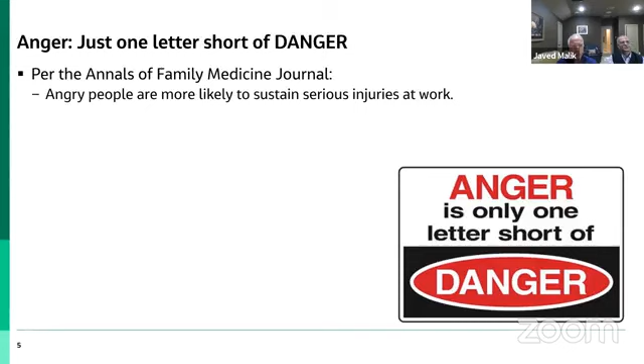But we need to remember that anger is just one letter short of the word danger, because it can lead to dangerous actions on the part of that person who is angry. I will give you these stats here that angry people are more likely to sustain serious injuries, not only at work, but every place. I will not go through these stats, but as you can see, most of the patients who were injured were angry or irritable before that accident occurred.

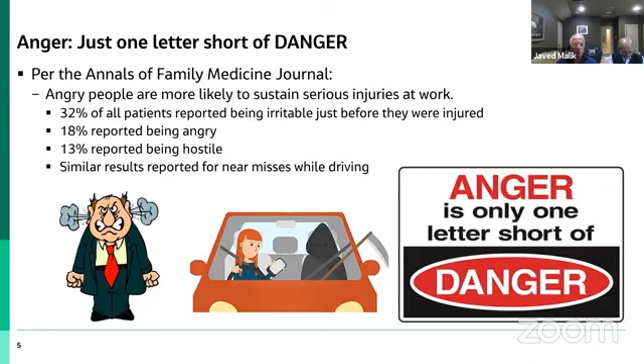So we have to see what we can do to take care of the anger. Just to share with you a recent story in our Houston area: one of our Imam Masjid, his two sisters were driving and they were killed by an angry driver, because somebody must have cut off the other person or whatever. I don't know the details, but because of his anger, this person got out of the car and killed two young girls. So we need to avoid those situations.

So what can we do to basically avoid being angry at work? I use the word 'at work' because here in US, there are some angry people who, if they are laid off or whatever happens to them, just pick up the gun and start shooting, whether it's school, work, or anywhere else. So the slide is tailored towards anger at work, how to avoid that.

So we need to basically determine the reason for the anger and try to remain calm. We should not react immediately or overthink. We need to assess the situation and see what we can do. We need to communicate. Most of the anger occurs because we are not communicating properly, either we are not listening or the other person is not listening. So if we can communicate better, that can hopefully take care of some of the issues.

The next thing is, if you cannot get away from an angry situation, you can remove yourself. You can move out. If there's a person who is bothering you, continuously attacking you, just avoid that person, because he will make you angry and you will react in a bad way also. You can take a walk, take a break, do things that make you happy, and look for the positives. Always look at the glass which is half full and not half empty. And also, don't sweat the small stuff. Don't get mad on small things which are not going to bother you the next day, so there is no reason for you to be angry about those today.

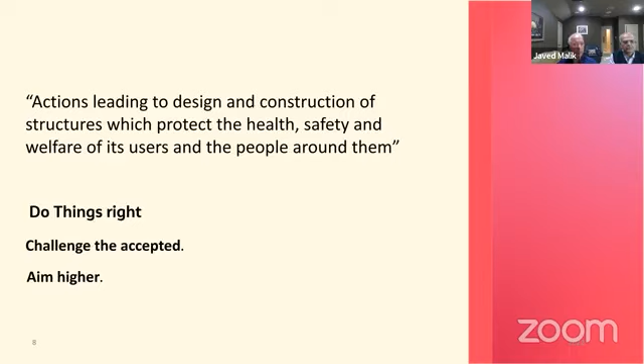So the gist of a good engineering practice is good ethics. And I will come into more details on what the good ethics are.

Competency - good ethics alone are not enough. A person who is practicing must be competent enough. He should know what he is doing. And then competency even is not enough if you do not keep yourself up to date with the state of art knowledge. You need to at least be aware of what is around, what's going on in the structural world or in the world in general, what other people are doing. So that is very important.

And then the use of modern tools and technology. The world is advancing. I'm working on some projects right now where the deliverable is not even the drawings. We are so much used to these paper drawings and documents, but on that project, the deliverable is the Revit models. So you deliver these Revit models to the clients and they take it from there. Of course, there are still typical details and notes in PDF form, but paper is gradually going away.

So we need to be aware of what are these modern tools and technology. If somebody is not well versed in Revit nowadays, then he's losing the battle already. So we need to be up to date with these tools and technologies if we want to compete with the rest of the world. And then also, the quest for excellence should always be there.

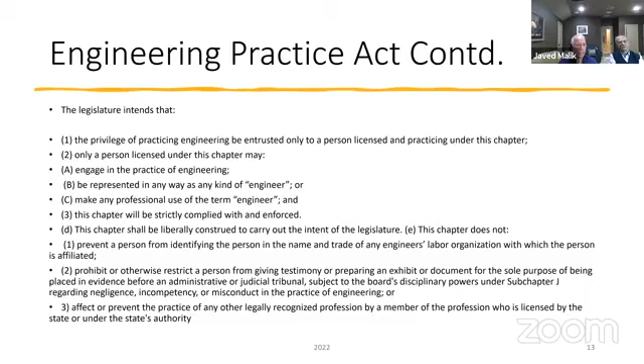Here are some more details of the Engineering Practice Act. I just copied it in; you'll get a PDF copy of this presentation so you can read it. But the gist is that any licensed engineer is responsible for his design, since he is entrusted with the health, life, and safety of the public. The sealed contract documents must be prepared under the direct supervision of the design professional. You cannot just give your project to somebody else and say, you do it and I will sign and seal it — that is totally illegal. If it is found that you did that, your license may be revoked.

Only a person designated as a licensed professional engineer can sign or seal the contract documents. Every month I get a letter from the state board — I'm registered in more than 20 states — telling us how many people's licenses were suspended or what actions were taken. Some of these things may seem very minor, but people are supposed to be totally honest and work with integrity. So these are the very first things of good engineering practice, as I said: good ethics.

So with that, we'll move on to the next part, which is the quest for excellence. As I said, good ethics alone are good, but if you want to practice engineering, you have to shoot for excellence. Here is Dr. Asif Wahidi, who was an engineering manager for many years. He will give some tips to young engineers as to what to look for and what to do. So without any further delay, I will hand it over to him.

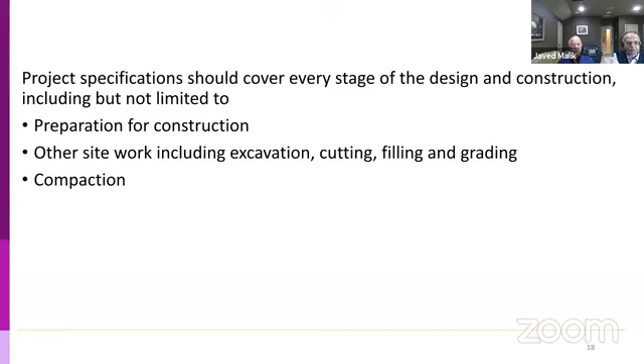Moving along, the specifications should also include excavation, cutting, filling, and grading. Compaction should also be included—we don't have to specify everything exactly, we can refer to standards already in place. For compaction, we have ASTM standards, like ASTM D698, and another one I don't remember the number for. We need to specify which standard to use, the maximum compacted density required, and that compaction should be done within a few percentage points of the optimum moisture content.

Digging or drilling for foundations is very important. Foundations have a few things inherently important that we need. Number one, the base of the foundation where the load bears should be on undisturbed soil. We should tell the contractor to give the geotechnical engineer the opportunity to come in and verify the soil capacity by observation and conducting on-site penetration tests, to make sure the recommendations given for design of foundations are still valid.

For footings, the contractor should not dig with big equipment quickly and leave the bearing surface disturbed. For drilled piers, they should be neatly drilled. Bells of the piers should have the required support so they don't cave in. The drill piers should be drilled just before we are ready to concrete. The belled piers should not be left open overnight, because caving could occur or rainwater could get in. So the concrete should be poured immediately after that.

All this should be in the specifications. Otherwise, the contractor may not do it and you cannot enforce it—they may ask for extra money and so on. Any material used on the site, including materials for concrete, coarse aggregate, fine aggregate—all specifications should cover everything needed on the site, including procurement of the materials.

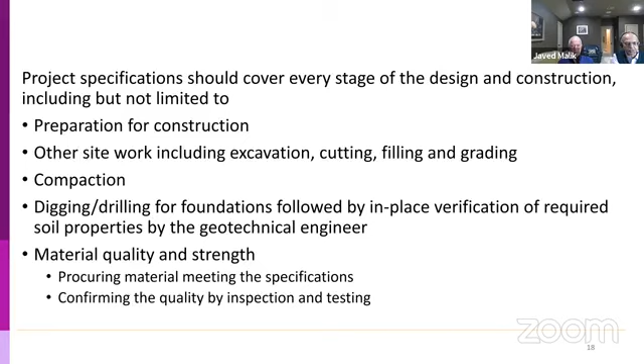And nowadays, as we see the effects of climate change, more and more standards are being developed to use recyclable material and low carbon footprint materials to be environment friendly in our construction. Some of the things we have been doing in the past is using less cement on our projects by replacing it with fly ash and blast furnace slag and stuff.

And also, there are requirements for obtaining materials. In the US, you get credit for getting material for construction from within 500 miles of your construction site, and so on and so forth. This area of knowledge is developing very fast. We should keep abreast of it and apply the latest knowledge on every project.

Then safety of construction during construction is important. That should also be stressed in the specifications. Good contractors will always follow good practices, but we have to make sure that even the ones which are not so good should do the job correctly.

Special instructions should be there in the specifications for storing materials on site and stacking them. The contractor should not stack too much material on slabs and structures, which may exceed the capacity of the structure during construction or may cause cracking or deflection. Also, stacking material on the ground on site is not good. The material should be elevated from the ground and protected from rain and stuff like that.

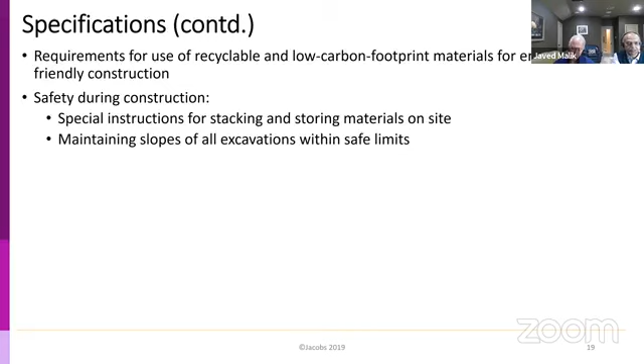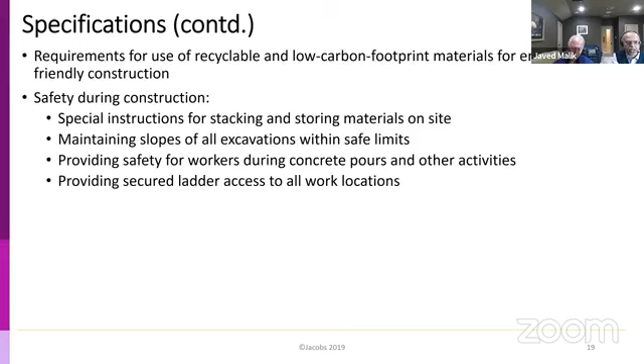Contractors should provide safety for workers at every stage of the project, during concrete pours and other activities. They should provide secured ladders when ladder access is needed. They should have people working in groups of two or more and avoid having people working alone in isolated areas, so that in case of an injury, there are other people around to help immediately.

Fall protection is very important for people working on elevated levels at the edge of slabs or roofs, since workers are susceptible to falling over. All workers working on elevated levels should wear safety harnesses, which should be tied back to secured tiebacks on the structure.

Inspection - I'm not talking about inspection itself, but the specifications should require that inspections be done. It should require that inspectors are chosen by the design consultants, and it should direct the inspectors to ensure every part of the specifications is followed. They should include what parts have to be inspected and when, and make sure inspection is done at every stage.

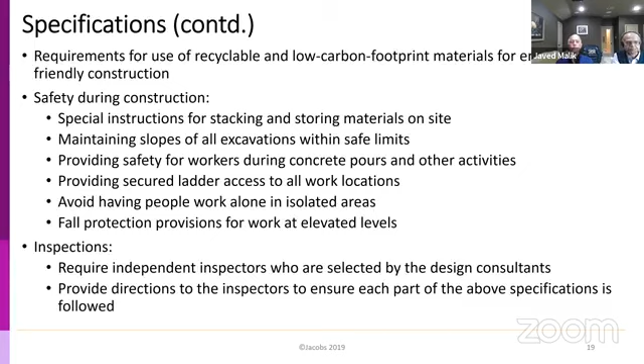After the specifications are done, we move into the design and construction phase. Here also, we need to continue the quest for excellence. One of the first things we do is make a computer model and analyze it.

One of the things we think about on every project, and we should, is loads. We should consider all loads that could affect the safety or serviceability of the structure we are designing, including gravity loads, which are dead loads, superimposed dead loads, and live loads.

Dead loads can be estimated very easily based on the density of the materials and the volume of the materials used in the structure and finishes. Superimposed dead loads and live loads are obtained from codes. They are based on a statistical analysis of loads, which is confirmed in existing structures randomly.

Some people do random inspection of loads. They go in and observe the load and note it down at certain instances for every occupancy. Then using statistical analysis, we confirm that the loads given in the codes are correct. If not, they are revised.

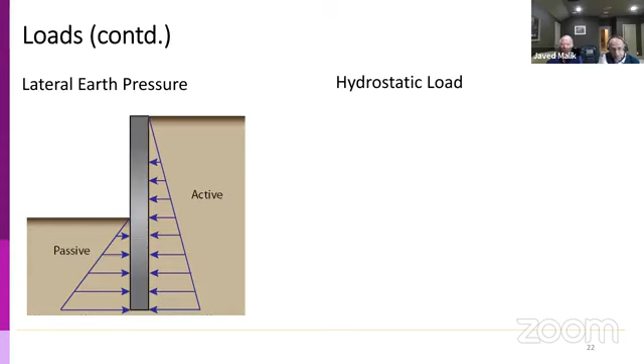So we can talk about the next type of loads: hydrostatic loads, and floods are on everybody's mind. For all of us - Javed, me, and everyone in Pakistan - flood loads have to be considered, hydrostatic loads have to be considered. Both these loads, lateral earth pressure and hydrostatic and flood loads, should be considered with maximum intensity.

But remember, for some cases, the worst intensity of the load may not be the worst case for the structure. For example, for an empty water tank, and also the underground water pump station I mentioned - when the water tank is empty, and when the pumping station was dry inside, that was actually the worst case. So we need to consider also when these loads are not present, as in the case of an underground water tank.

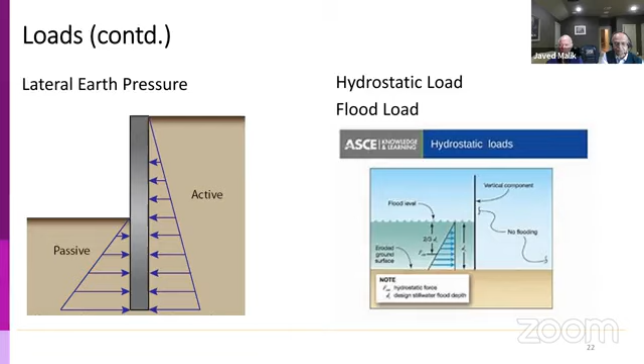For wind loads and earthquake loads, which may act in the opposite direction of earth pressure or hydrostatic pressure, the worst case is when these loads are not present.

Next load case - you guessed it, I already started talking about wind and earthquake - environmental loads. Wind loads are obtained from codes. Codes present statistical analysis based on wind speed observations made at different locations. This statistical analysis gives us the worst loads expected for the category of storm we are designing for, and the category of storm depends on the risk category of the structure. Higher the risk category, higher the design wind speed.

Wind loads - usually in a lot of codes these days - have a load factor of 1. So we should make sure we are using wind speeds which will result in loads with a load factor of 1. For serviceability conditions, for deflections, wind vibrations, and everything, we use lesser loads which occur more frequently on the structure.

Next, we move on to earthquake loads. Earthquake loads, like wind loads, are obtained from codes, which again are based on statistical analysis of data obtained from the sites.

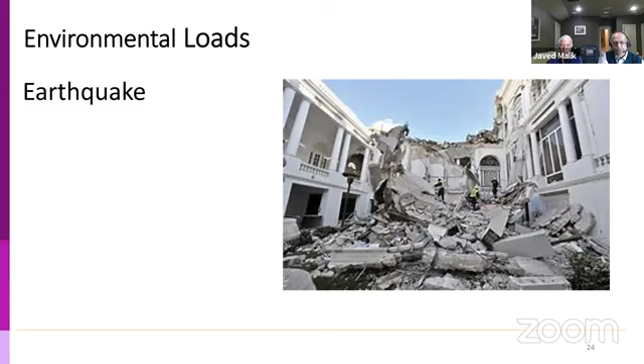Some structures like hospitals and emergency structures for firefighting are required to be operable immediately after the earthquake. Other structures need to be operable soon after, and some maybe later on. Depending on how soon the structure has to be operable, or if the owner wants special requirements to keep a manufacturing facility going, that determines how much earthquake movement and damage we permit for serviceability conditions.

The building had a transfer girder at the second or third floor which carried several columns. The girder failed due to the explosion, and the column supporting it also failed. This brought down all the columns supported on the transfer girder and a few columns nearby, resulting in progressive collapse, which was much bigger than the initial damage caused by the explosion.

We are required to design federal buildings in the United States to prevent this type of failure, classified as progressive failure, where much larger damage occurs than could be expected from the amount of explosives used.

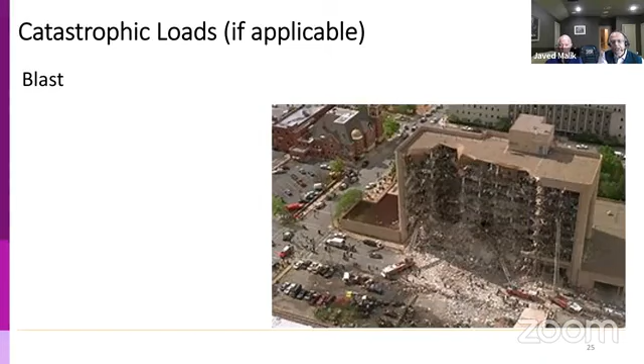Fortunately, not all structures are required to be designed for blast loads. Only those with a security concern, like federal buildings, and some owners with security concerns need this. Other facilities like petrochemical plants and plants manufacturing explosives or ammunitions, and areas around them, need to be designed for blast.

Tsunami loads are becoming more and more common in codes. A lot of literature has been developed and knowledge gained after the 2004 earthquake in Banda Aceh, Indonesia, and the Tohoku earthquake in Japan in 2011. This area still has a lot of research being developed, with codes and standards getting updated. We need to keep abreast of new requirements, and if designing any structure on coastal areas, ascertain if there is a possibility of a tsunami and check if the codes require tsunami load design.

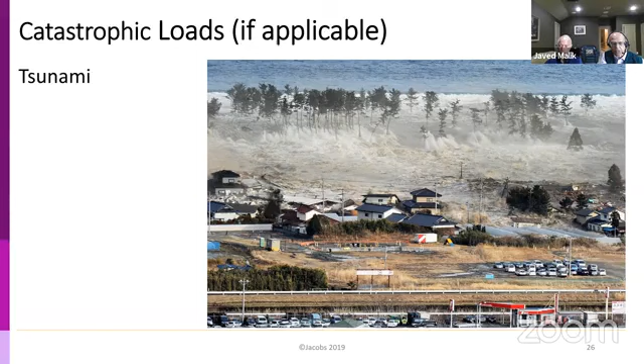Construction loads are important. Typically we don't design for construction loads, but in many structures construction loads could actually be heavier than service loads. The worst design conditions may occur when the load is on a partial span of the structure, or the structure itself or some element may be partially built.

We need to provide special instructions to the contractor on contract documents if any special sequence or procedure has to be followed during construction to keep the structure safe at all stages. We should also include instructions to provide additional supports if needed, or falsework needed during construction.

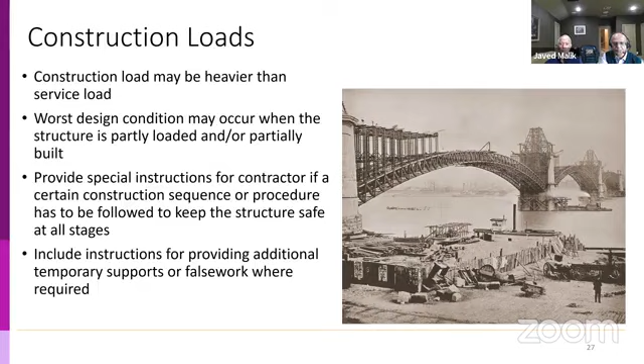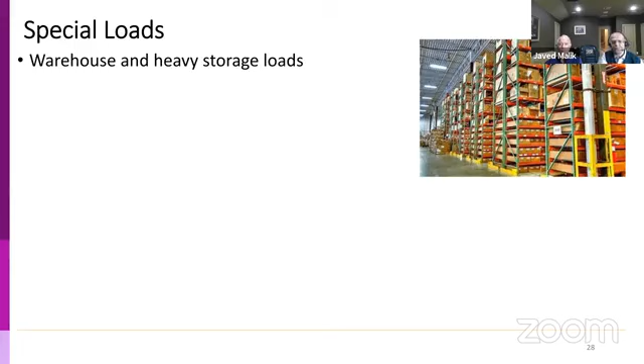Special loads - there could be a lot of them. I listed just a few, starting with warehouses loaded with heavy storage loads. Even the loads may be on slab on ground, so we need special design considerations for them.

Loads for machinery and movable equipment, which require strict construction tolerances and strict deflections, should require special design considerations.

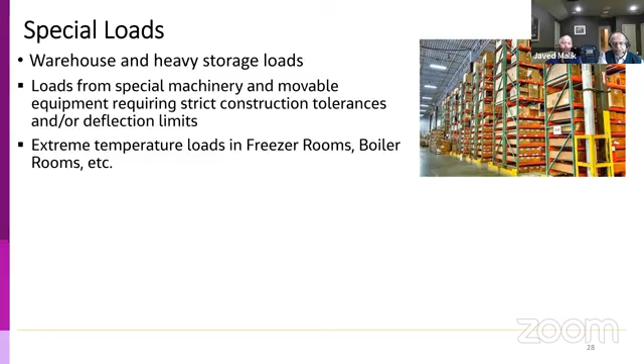Extreme temperature loads should be considered in freezers and boiler rooms. I've learned from experience that in freezers it's especially important to provide a thick slab at the bottom or additional insulation to prevent damage from frost heave. Additional insulation can also give us economy in energy consumption.

Creep, shrinkage, and temperature effects are important. Normally these occur on every structure. Smaller structures don't normally have to be designed for these, but large structures like warehouses and distribution centers need expansion joints.

Analysis of creep, shrinkage, and temperature can help us in sizing the expansion joints and determining where and how many joints to provide. Creep, shrinkage, and shortening analysis are also very important in tall buildings, where the exterior and interior columns may shorten differentially due to creep, shrinkage, or elastic shortening. We need to conduct an analysis and make adjustments to the lengths of the vertical load supporting elements to make sure our floors end up leveled at upper levels of the structure.

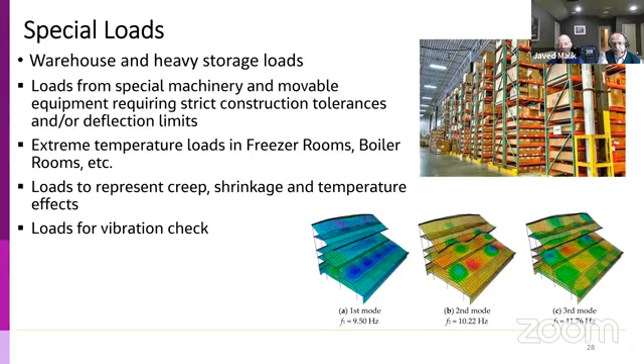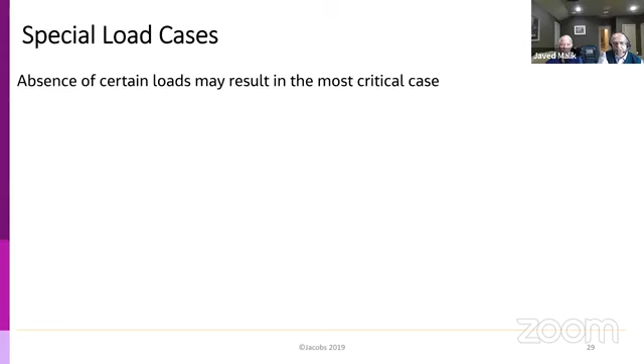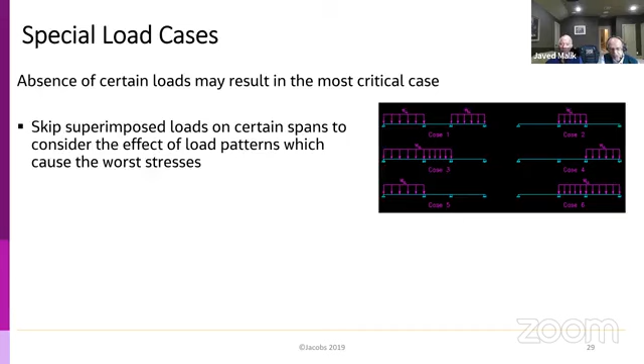From special loads, we move to special load cases. For continuous structures, the worst case is not loading all the spans with the maximum load. Often, the worst moments and shears are caused by pattern loads as shown in the pictures. Similarly, for structures like domes, arches, and even trusses, partial loads or point loads could cause stress reversals or maximum stresses more than what you expect under full design loads. So partial loads should be considered. Point loads, which may be even less than the full superimposed load, could cause more stress in a dome or arch, and even stress reversals in trusses.

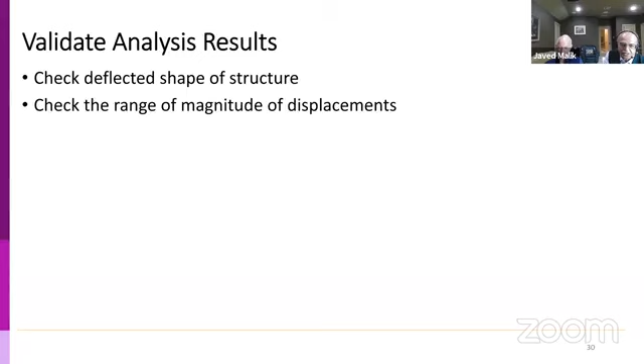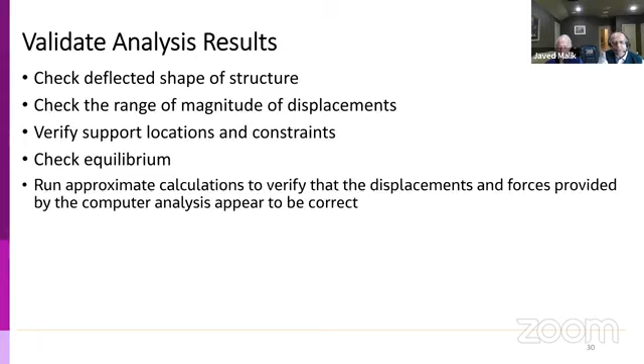Now we're done with the loads. Engineers have the habit of just doing the analysis and getting onto the drawing, or as Javed said, maybe completing the Revit model and sending it out. You are not ready for that. A good engineer always checks the results. Once you get the analysis done, make sure the results are valid and there's no mistake. So check the deflected shape, check the range of displacements, verify support locations and constraints, check equilibrium, and run approximate calculations to see if displacements and forces in your computer analysis seem reasonable.

We are going to get into each of these. Deflected shape is the easiest and most valuable information to look at — the deflected shape and the magnitude of deflection. Important thing to note: don't use the worst possible, most complex load combination to do this. Keep it simple. Keeping it simple helps you see what's going on. So use cases with vertical loads only, lateral load cases only, special load cases individually, no load combinations. Then, with your intuition, you can tell whether the deflected shape looks right or wrong.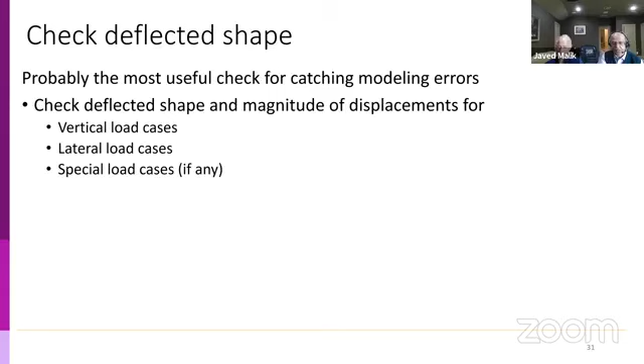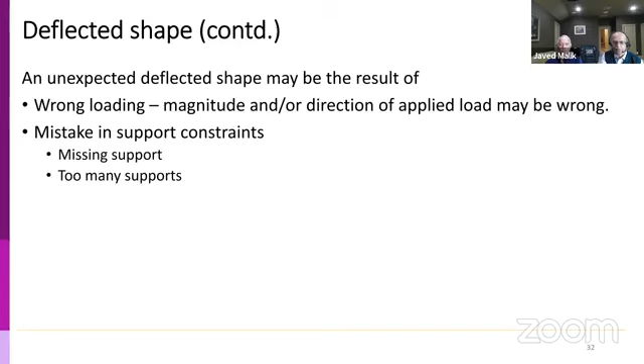If it doesn't look right, there could be a mistake in the loading or in the support constraints. There may be missing supports, too many supports, or wrong constraints — maybe a fixed support is represented as a hinge or roller support, or vice versa, things like that. What if the deflection shape looks all right? You should also pay attention to the magnitude of the deflection.

If the magnitude of the displacement is wrong, the first culprit is definitely member properties. Check the member properties — there could be a mistake in member size, material selection, or property modifiers, which we use for modeling cracking of materials and other stuff. Those could be wrong. These are the most common factors, but then the load could also be wrong — the load magnitude could be wrong, or some load could be applied in the opposite direction, and stuff like that. This does happen also.

I've had this happen. When we are auto-generating loads, our computers are very smart these days. We can generate the loads automatically from wind and earthquake, but sometimes the auto generation may not work fine.

One example I want to relate here is related to aeronautics, an airplane. This happened in Canada and it almost caused a disaster. There was a flight in Canada about 600, 700 miles range. The people fueling the aircraft calculated the weight of fuel needed in kilograms, and when they filled in the tanks, they loaded based on the same number of pounds.

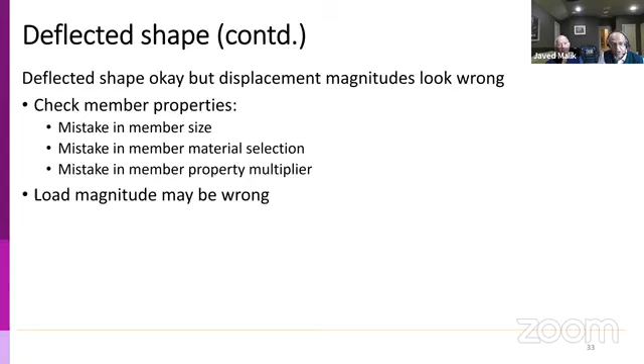Similar things could happen. In the United States, we still work using pounds, but we get projects where stuff has to be noted in meters, kilograms, and so on. This can happen to us when mixing units. So be careful with the loads - I cannot stress this enough.

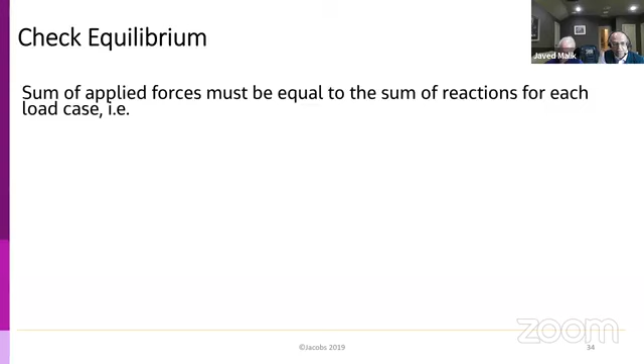Next, check the equilibriums - very intuitive. These equations I'm showing are very simple. You're saying, why is he showing this? All the sigma fx, y, z, mx, my, mz - these are always zero. They're always zero because our software takes care of it. This is not what I mean.

When I say check the applied loads and whether they are equal to the reactions, you calculate your applied loads by hand. Use vertical loads only or lateral loads only, not load combinations, to keep things simple. If you've got a live load case, 100 PSF of live load on every floor, just take the area of the floors, multiply by 100, and you know the total load. See the total reaction in your computer. If it doesn't match, there's a mistake.

Auto generation of loads - we have had problems with that on many structures. Auto generation saves a lot of time in making a model and running it for wind loads, earthquake loads, but sometimes the software does not apply the load correctly. Sometimes the members on which you are applying the load - you forget to select one member, or you select a lot of extra members which you don't intend to, and the load is wrong.

One time I remember, our software was not calculating wind loads on the parapet wall. We had a 3-story structure where the parapet walls were significant. So we auto-calculated the wind load using the software, and the engineer manually input the load on the parapet. We knew the base shear. When we ran this structure, we looked at some of the loads, some of the reactions.

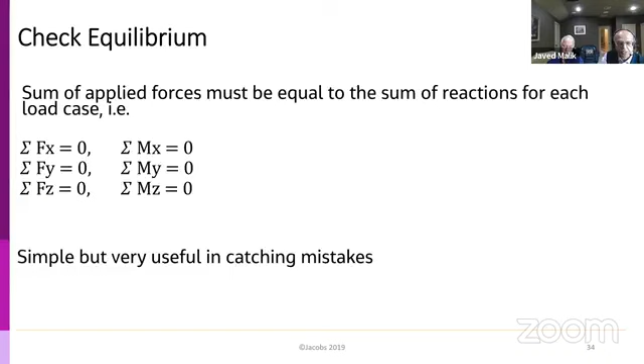It was very small. Accidentally, our engineer put the wind load with the wrong sign - the wind load on the parapet was acting opposite to the auto-generated loads. These things happen. So in short, calculate the applied loads and use the total sum of the load on the building - live loads, wind loads, base shear, earthquake base shears - and compare them with the total reactions. What if they don't match? Then some loads may be missing, unwanted loads may be there, or a few loads may be applied in the opposite direction.

Unintentionally, this has happened to me also - I made a model and somehow, I don't know how, the software generated a support somewhere maybe hundreds of feet away, which was not even showing on the model. When I selected my supports and looked at some of the reactions, it did not match. So these things happen, and sometimes unintentionally some loads go somewhere where we don't want them to.

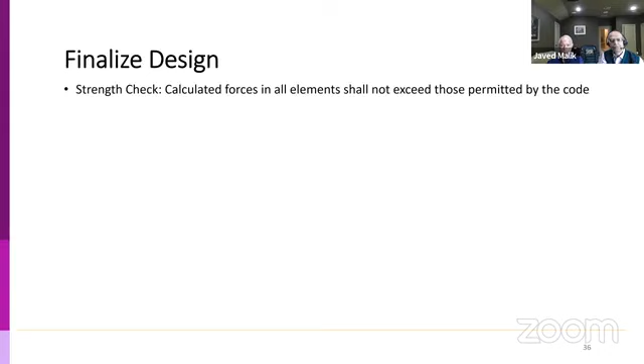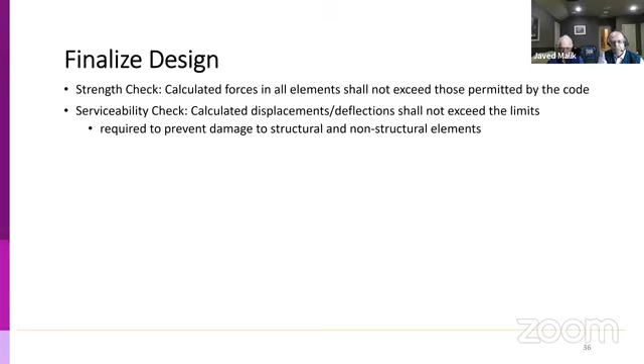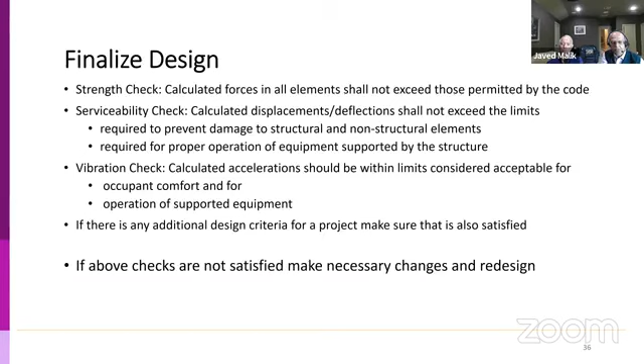After the loads are checked, finalize your design. Make sure all the forces acting on all members are less than those allowed by the codes. Serviceability requirements - displacement, deflections - are less than those permitted to prevent structural damage, or are based on safe limits for operation of equipment, etc. Vibration limits are in the safe limits for occupants and safe for the operation of supported equipment. If there is any additional criteria on a special structure, that should also be satisfied. If the above checks are not satisfied, you have to redesign and make sure everything works before you issue the drawing.

Before issuing the drawings, do quality control. Quality control should not be done only at the end of the project, but throughout. Appoint a quality control team in the beginning, keep them informed about the design criteria, and if you make any changes, have quality checks during the design process at 30% complete, 60% complete, final, and so on.

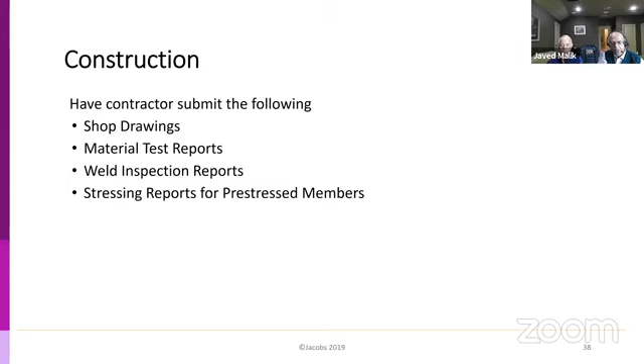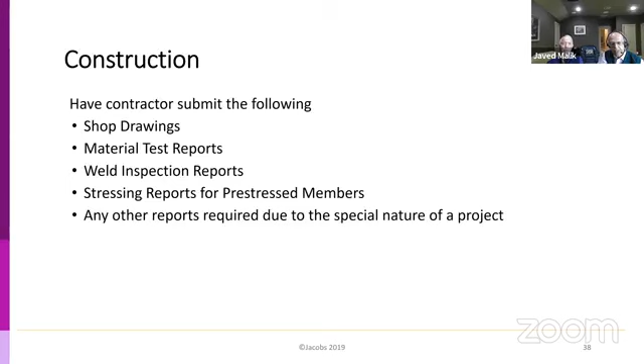During construction, we need to observe what's going on and have the contractors submit a lot of stuff so we can monitor that everything is being done according to our contract documents: shop drawings, material test reports, weld inspection reports, stressing reports for pre-stressed members, and any other reports needed due to the special nature of the project. Anything that does not meet the design document, we should reject and have the contractor correct before we move on. Then we move to site inspections.

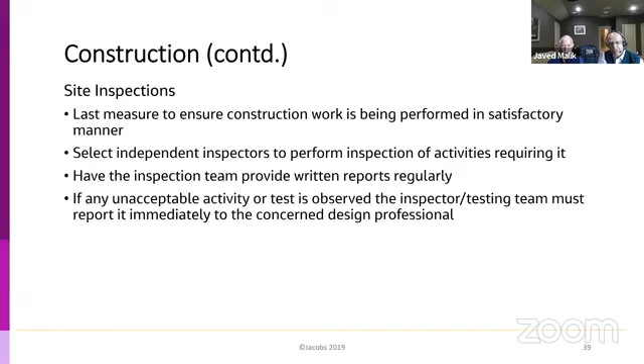A last measure to make sure everything is going right is site inspections. We should appoint the inspectors, direct them where to inspect and when, and ask them to report everything in written reports regularly. If anything is found which is not safe, or the tests are not meeting the requirement, they should report to the design team immediately. All unacceptable conditions should be corrected immediately and re-inspected till everything is found satisfactory.

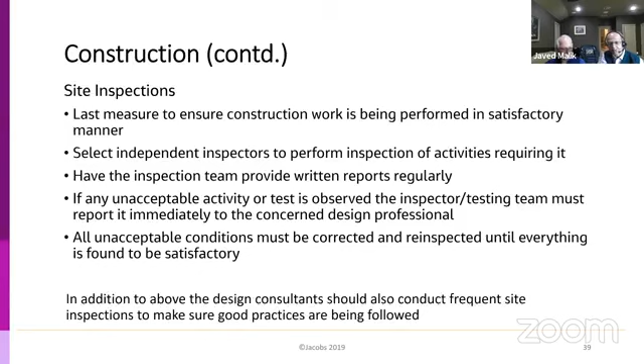I'm going to stop here and hand it over to Javed. Sorry, Javed, that took a lot of extra time, and we move on. Thank you, Dr. Wahidi.

While he was talking, before I start with this quality control review process, I realized there's an important slide we could have added about knowing what materials to use. We are used to certain materials and we use them, but as an engineer, if we want to shoot for excellence, we need to know what is out there that is available.

One of the things that has lately become available is high grade rebars. We were used to grade 60 rebars. When I was young, when Professor Ziauddin Mia was teaching us, we used to use grade 36 or grade 40 rebars. Then in the US, we went to grade 60 rebars. Now grade 80 and 100 rebars are available, and we should use them.

I was doing a project last year for a big electric vehicle manufacturing facility. There were long spans, big loads, and I was the engineer of record for part of that. I proposed that we use grade 80 rebars, and the contractor was resistant because he was used to grade 60 rebars. So we did a price survey and found that grade 80 rebars are only 7% more expensive than grade 60, but the increase in strength you get is 80/60, which is 33%. So you're getting 33% more strength for only a 7% increase in premium. Finally we were able to convince the contractor, and he used those.

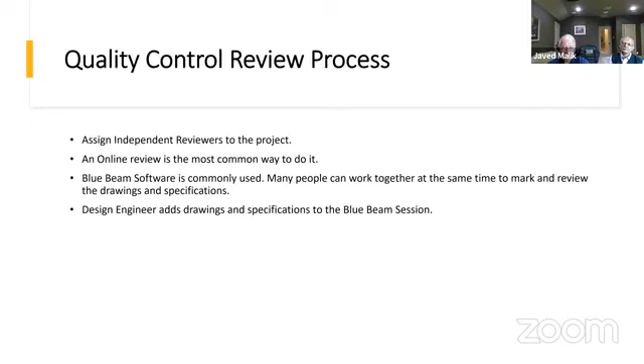The process goes like this: the design engineer adds the drawings and specifications to the Bluebeam session, and the assigned reviewer reviews the documents and makes comments in red or blue or whatever color he chooses—red is the most common. Then the design engineer either accepts the comments and modifies the documents or does not accept them. If he accepts them, with one click, the comment changes to green or another color, and that way the reviewer knows the designer has accepted it.

If there are comments which are not accepted, they are discussed with the reviewer to let him know the reason things were done that way. Once a resolution is reached, the reviewer makes sure the drawings are corrected, checks the corrected drawings again, verifies his comments have been addressed, and then signs off. Different colors are used during the review process to identify comments, and they become part of the record. This is a screenshot of a Bluebeam session I was in—there's a comment in red because I noticed a column coming in the stair.

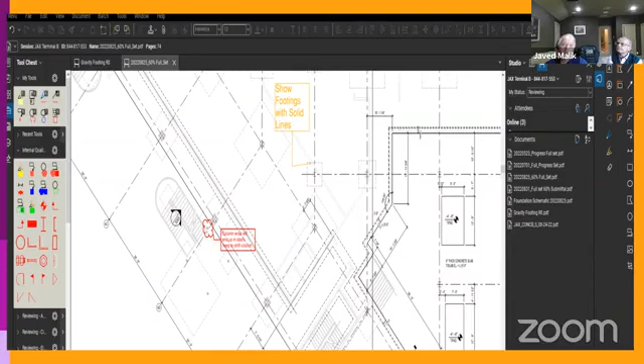So I alerted the Revit designer that his column is either jumping out of the building envelope or getting into the stairs, so he's supposed to look at that. There was another comment which I had. I wanted to show him the spread footings with solid lines, and that comment was not accepted because the designer told me that this view is taken several feet above the footing level, and there are other things also, so that's why they have hidden the footings. With this kind of communication, you can basically give a very good quality product to your clients.

Now we will just have some structural news and information. As I said, being a good engineer, you do not have to do everything. You at least have to know what's going on, and if there's an issue, know the person who you can go to who can give you an answer for that.

So here's a list of the latest codes. The latest code is the International Building Code 2021. Then we have ASCE 7-22, which has just come out, the minimum loads and associated criteria for buildings and structures. We are still using 7-16, but ASCE 7-22 has come out, and I will briefly discuss the changes in that. American Concrete ACI code 318-19 is there.

There are very significant changes in that, and I'm reviewing a lot of designs where people are not using the changes which have been made in this code, particularly for the shear design. And they're giving me the excuse that the city where the project is located does not require IBC 2021 - they are still doing it based on the previous IBC version, which deals with ACI 318-14. My response to them is that safety cannot be compromised. If we know that something has changed, then we need to take care of that.

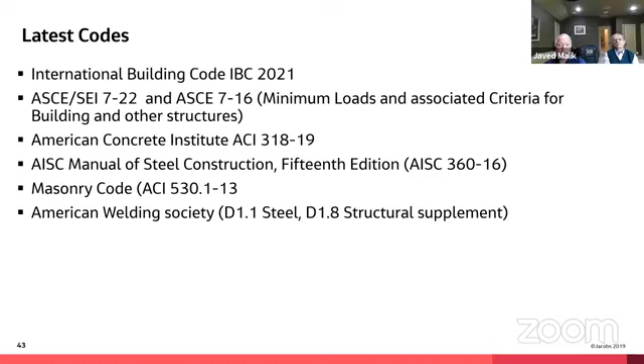Then the AISC Manual of Steel Construction - we are still using the 15th edition, but the new version is coming pretty soon. The masonry code is ACI 530.1-13; a newer version of that is coming. And then American Welding Society D1.1, D1.8 structural supplement, that's what we are using. There are several other codes here which I have omitted, but these are just for quick reference so we know what's happening and what codes are out there.

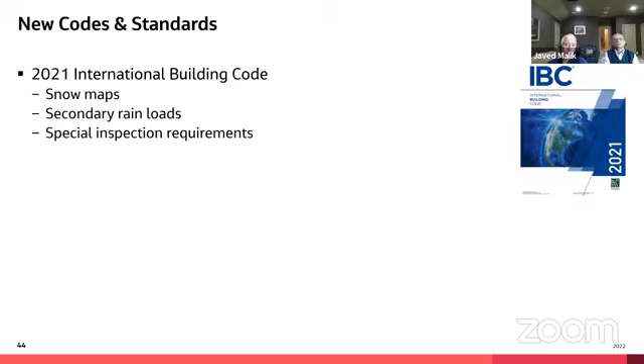So 2021 building code IBC, this is how it looks. The snow maps have been modified. Secondary rain loads have been added. Special inspection requirements have been added. ACI 117 and ITG 7 have been added by reference for concrete tolerance.

Now you will question, how do I know this? I can tell you I have not even touched this 2021 code, so how do I know? Because in our company, we have a department who deals with this thing. We task the young engineers to go and see what's going on with the new codes, so they give a complete report to us as to what's happening, and this is their finding, which I'm sharing with you. Bottom line is, I don't have to know everything myself, as long as I know the person who knows that, and I ask him to help me, he can help with that.

Now in ASCE 7-22, minimum design loads, this new version is out there. This is how it looks, and I have a PDF copy of that, though I have not glanced through it yet. We are still using 7-16, but this is out there, and pretty soon everybody will start using it, so why not use it now? Particularly if you are doing a tornado resistant design, there are new provisions in there which we can look at.

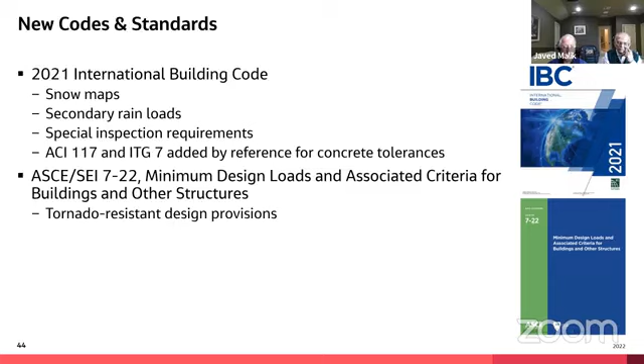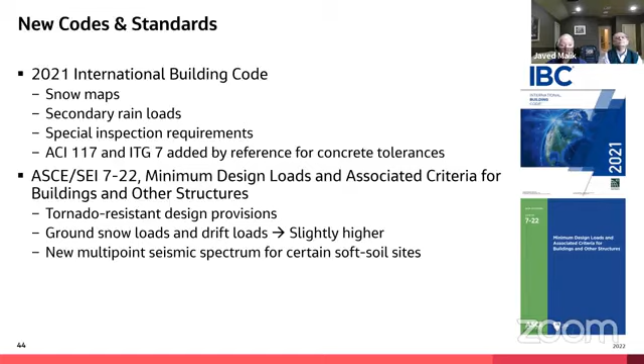Ground snow loads have been changed - they have become slightly higher, those drift loads. A new multi-point seismic spectrum for certain soft soils has been added.

There are several ACI design publications which are out there to help you. These are companion to the ACI 318-19. They help you understand what's going on, what is the reason behind the code provisions. So a good engineer should look at those - if there's any question in his mind, then he needs to look at that.

ACI 1721 volume 1 is for member design, so it contains more than 1,000 pages of detailed examples of one-way and two-way slabs, beams, diaphragms, columns, structural walls, and foundations. Volume 2 is the special topics, containing examples for retaining walls, serviceability, strut and tie method, and anchoring to concrete.

These are both combined in one PDF version. Unfortunately, I had to remove the link. On this presentation, there was one click where you could have gotten access to those documents, but because of the copyrights, I had to remove that.

ACI 1721 volume 3 is design aids. Basically it contains the reference tables, analysis tables, sectional properties, and column interaction diagrams. Even though we have software now where we can put in numbers and it can develop those interaction diagrams for us, these are still some handy tools.

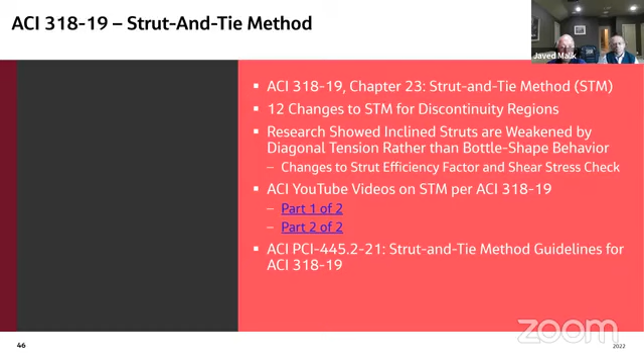And the ACI PCI combined strut and tie method guideline for ACI 318-19 is also there. This is what it looks like.

One thing I may want to caution you about, based on my recent experience with strut and tie, is that sometimes people complicate their lives. There are simple situations where they go with the strut and tie method, which requires a lot more involvement and calculations, when there are easier and simpler ways of doing things. So you don't have to always go with strut and tie - it's an option for complicated situations, but there are easier ways to calculate or design your members.

The new guidelines for tsunami loads and effects are there - it's the ASCE guide to tsunami design, 7-16. Dr. Wahidi, you were talking about that. So that guide is there now, you can read the examples in there. It provides clear and authoritative explanation of ASCE 7 tsunami load requirements, and includes detailed examples of prototypical buildings.

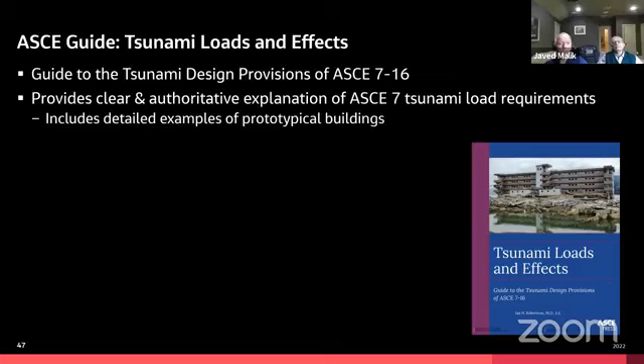There are other ASCE 7-16 design guides available. Seismic load guide is there, wind load guide is there - these basically, if you read them, will help you understand how the loads are calculated, and if there's a particular situation, how to apply the load requirements to it. Snow load requirements are there, and rain load guide is there. So all these design guides are available to help you.

ASCE wind load design for petrochemical and other industrial facilities - the new second edition is available now. This report is intended for use with ASCE 7-16.

As they say in Urdu, bahut der ki meherbani aate aate - we have got this ASCE 7-22 now available. So this guide is still referencing the old code, even though it just came out. But it's an ever-changing process.

Basically the guide covers the fundamentals of wind engineering, general aerodynamic design considerations and methods, specifically related to the types of structures found in petrochemical facilities. It deals with wind loads on open frame structures, alternate methods, and special wind load requirements for LNG facilities, which are probably needed in Pakistan for the energy crisis.

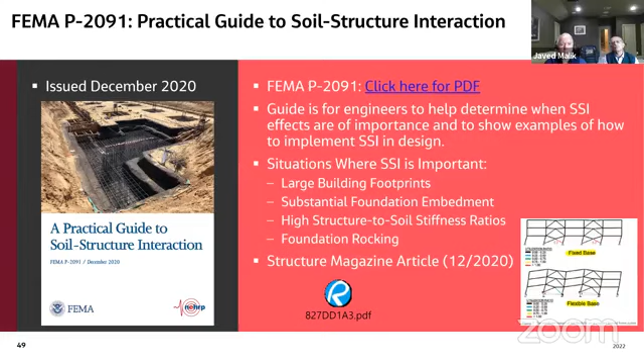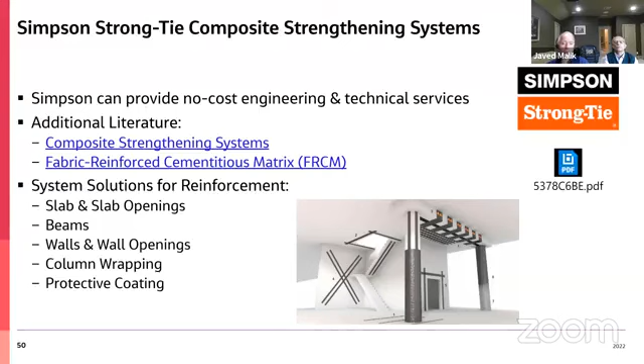Hilti and Sika have also these things. I know Hilti has a Pakistan office also, and Sika may have that also. So there are a lot of things out there. If you're cutting openings in an existing building, you can use these wraps as external reinforcement to stiffen the area around the openings, whether they are floor openings and stuff like that.

AISC Design Guide 25, second edition, is out there. It deals with frame design using non-prismatic members. I was mentioning that there is not much pre-engineered metal building construction going on in Pakistan—this is one of those things.

These buildings are very, very cheap—one of the cheapest kinds of construction that you can do. So there's a guideline here in case you want to design it. It tells you how to do the analysis. It was developed in conjunction with the Metal Building Manufacturer Association. It has 400-plus pages of design examples and gives detailed procedures on how to analyze these kinds of buildings, and it complies with AISC 360-16.

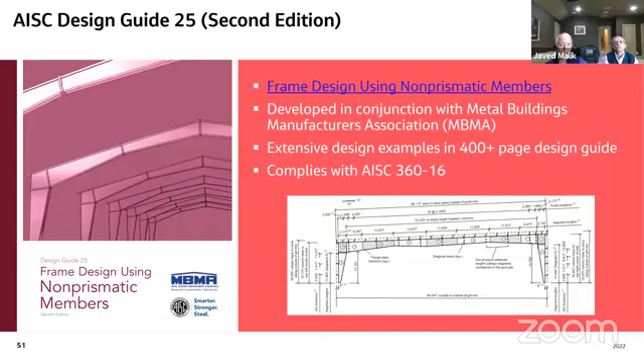AISC has several educational seminars, articles, and recordings out there—30 minutes to 6-hour seminars, and most of these recordings are free to view. This information is out there, and if you want to be excellent, you need to know what's going on. You need to spend some time reviewing these kinds of videos. This is the best application of electronic media for those who want PDH in the US—there are opportunities to earn those through these.

Then there's a steel conference which takes place every year. The next one is in Charlotte, North Carolina, on April 12 to 14. There are nice lectures, seminars, and presentations there.

Then Applied Technology Council is not behind anybody—they are a non-profit organization, and they have these ATC hazard by location maps. If there's a site where you're building, you can click the latitude and longitude of that building, and it will tell you what the wind pressures are, what the snow loads are, if there are any tornado loads, and give you the seismic characteristics of the soils in that area. For bigger structures, you may need a site-specific seismic study, but most of the information is there in one click. There are training opportunities also.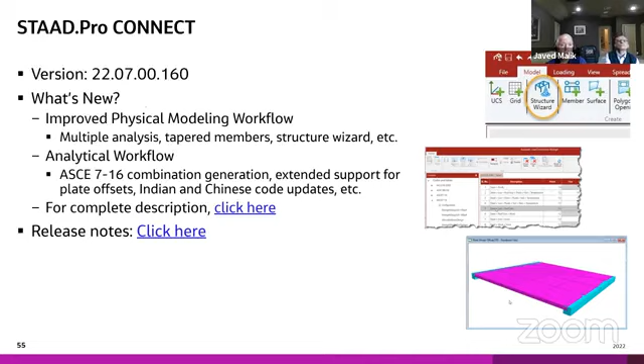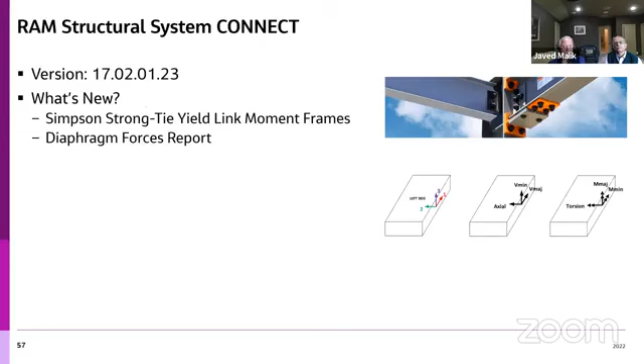RAM structural system, which is a very, very commonly used program, is out there. The newer version is out there, this is the latest version. And the new Simpson strong tie, they have added those special moment frames in there. Diaphragm force reports are now available. And these are some of the things which they have done, so you can click through those, through the PDF.

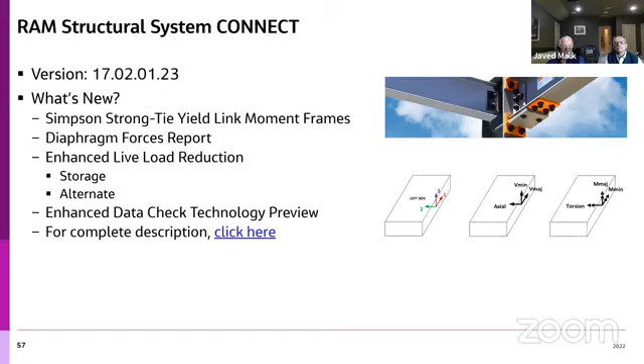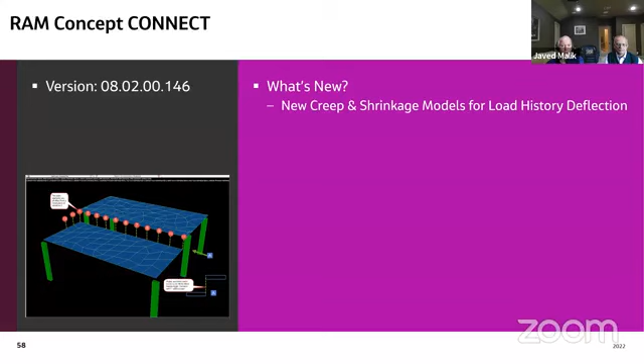Similarly, RAM Concept Connect is out there, this version. What's new? Creep shrinkage models for load history deflection. Some of the things, pre-compression check for post-tension sections, complete description, click there. Vibration analysis has been improved.

And all these softwares that we get in our company, we validate that. We ask some engineers, young engineers as volunteers, who just take simple models and run those just to make sure that they can validate whether the software is okay or not, rather than blindly accepting that.

Similarly, RAM connection, we can now use these column brace joints. And I do a lot of reviews and people are up to date, very comprehensive calculations that I get with pictures like this. And you don't have to design by hand anymore. All these software programs are pretty good. They can design all these connections for you and make sure that code checks are satisfied also.

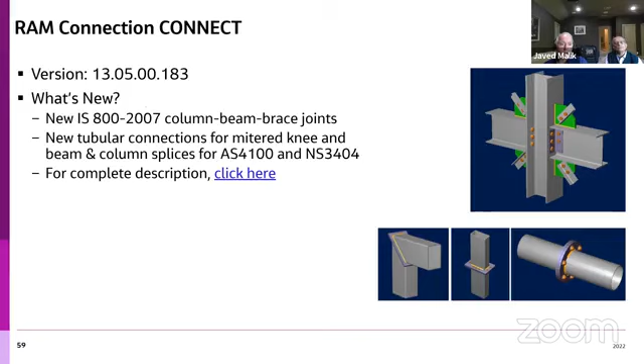Similarly, RAM elements, they have included that ACI 318-19 design in there. We were doing a project until a few months ago, and this 318-19 was not incorporated. As I said, there are substantial changes in the shear design of ACI 318-19. Now that the new version is there, we can make sure that our concrete design is per the latest codes.

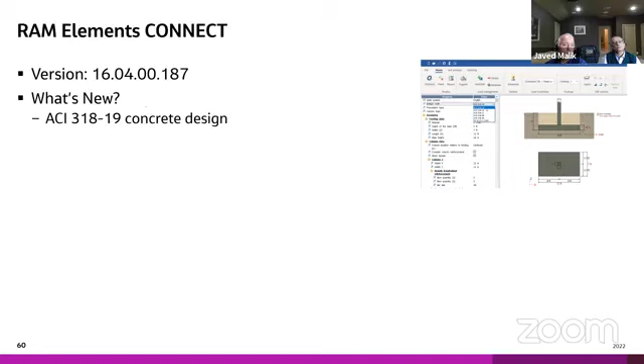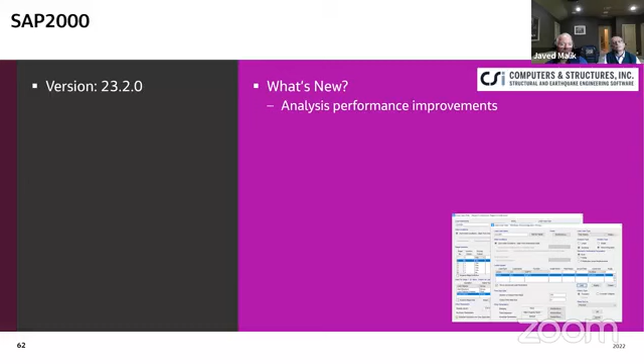SAP 2000 has been modified also. I will not go through the details, you can read through it. Aluminum frame design, US 2022, has been added.

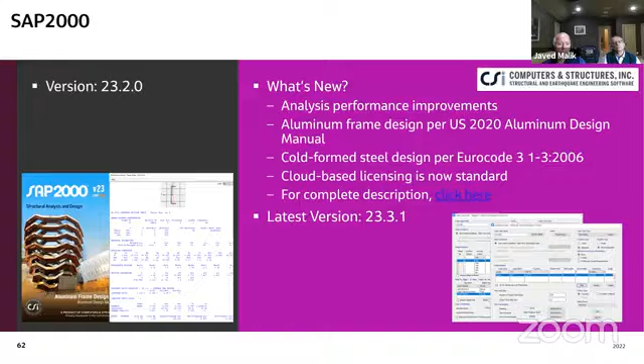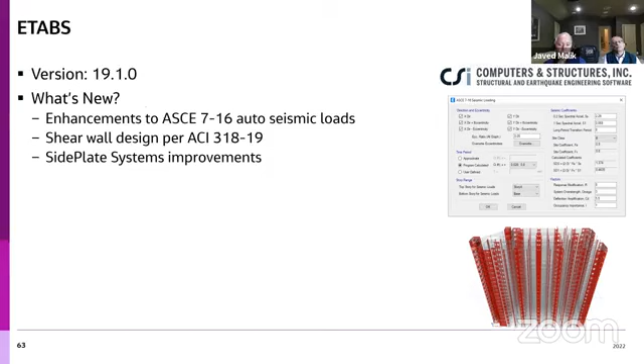ETABS. And they have also modified their shear wall design per the ACI 318-19. SidePlate Systems improvements are there. Side plate is a moment connection basically for steel members in the seismic zones, highly seismic zones, so that your yielding region of the beam is outside the column joint.

SAFE, which is a very, very commonly used program for the design of slabs and mats, they have also added 318-19 now. So you can design with confidence if you're using that program.

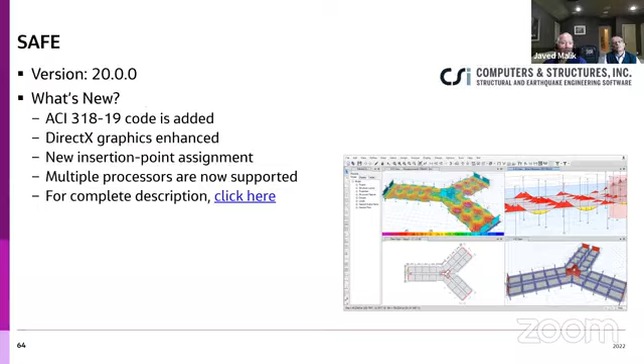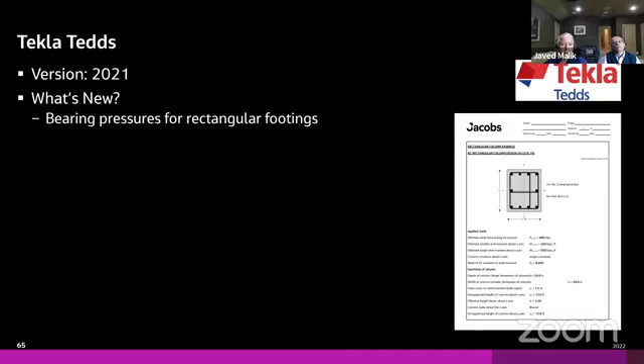Tekla Tedds is a good program. It's a simple program, basically, just like hand calculations. Version 2021 is out there. They have corrected the bearing pressures for the rectangular footings. Rigid diaphragm force distribution has been addressed. Rolling load analysis is there. And also, the key in all these softwares is that ACI 318-19, the shear provisions have been added.

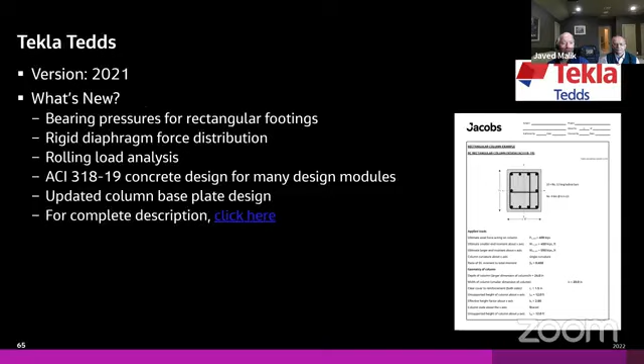Structure Point Mats, these are very, very good softwares. They are simple and cheap, anybody can get those. There are several versions: SP Mats, SP Columns, SP Beam, SP Wall. Here I'm going to talk about SP Mats.

There's a new user interface now, with much more advanced graphics. The older versions were not very nice. Now they are becoming compatible with other software, with new modeling and meshing systems. And as I said, this is a very cheap software.

The next program is Struware, which is a very, very good program to check the code. The version out there is 2021. What's new? IBC 2021 and ASCE 7-16 are already there. Rain loading has been modified.

The beauty of this program is that you put your wind loads, wind pressures, height of the building, length of the building, and the shape of the building roof, and it calculates and gives you all those loadings for the components and claddings. It gives you the seismic loads for that particular area and building, so a lot of calculation is already done for you in this.

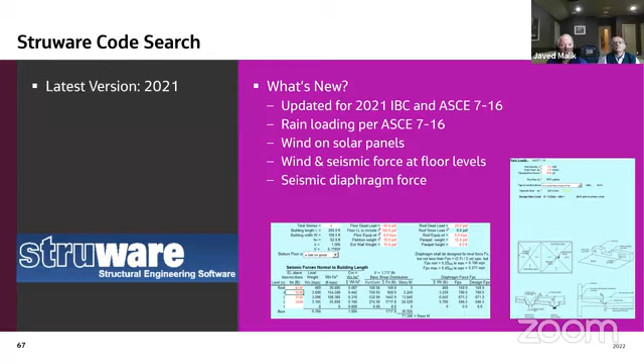Simpson Anchor Designer has their own program, this is their latest version. Hilti has their own program, Profis, a very nice program. It can design base plates, cast-in-place anchors, or post-installed anchors, and gives you a complete report based on the edge distances of those anchors. All of this information is there.

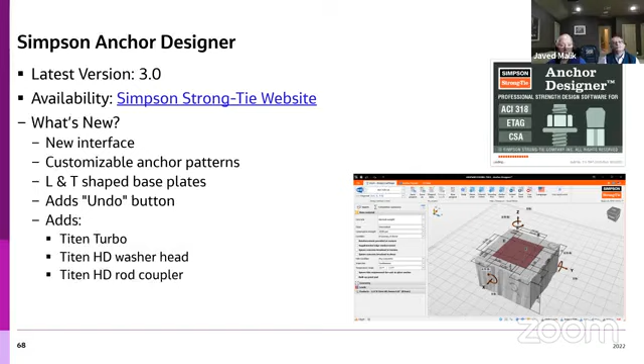The key here is you have to know what is out there. Our attempt was, at least today, to make you aware of what technology is being used, what other engineers are using, what software is there. You may not have access to all this software, but at least you know the capabilities and the latest versions.

So with that, we conclude, and thank you very much for your time. And if you have any questions, we will be glad to answer those.

Thank you very much, Javed Saab. The lecture was excellent. You have given so much stuff in just 90 minutes, it was difficult to digest. At least I will have to see the lecture again.